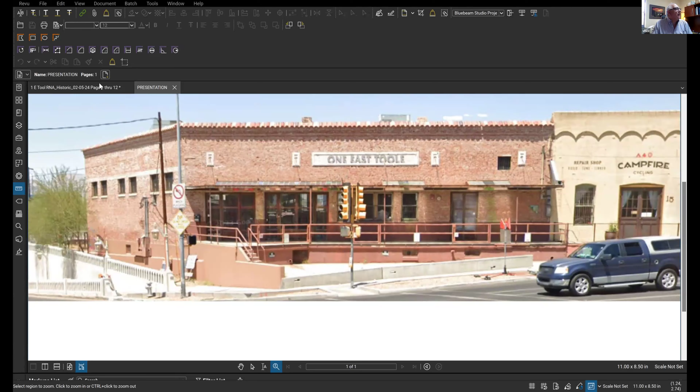I'm going to go to the presentation description. Basically, we're recommending installation of a handicapped ramp in the front, built out of steel to match the steel in the windows. We had originally proposed a cable system, which is what Rio Nuevo discussed. So the ramp is needed to meet handicap requirements and exiting—item number one, add an accessible ramp to the existing historic building. At this time, the building is not accessible.

Two, the building had a staircase on the west side that's been destroyed over the years—this project adds a metal staircase as a required second exit. Three, building code requires the existing basement windows along the west side be fire rated for an exit corridor. I'll show pictures in a second, but because the walkway along the west side is only 7 feet wide, the windows at that base have to be fire rated to protect people walking along the exit way.

For the south operable casements, they need to be replaced. At that time we started the process, it was just being tempered, but I just got the report back from the city yesterday, and they're requiring that those windows also be fire rated. So they're going to be fire rated windows in the steel frame, in the same locations as the windows along the basement storefront, but we'll be replacing with a fire rated assembly in a steel frame.

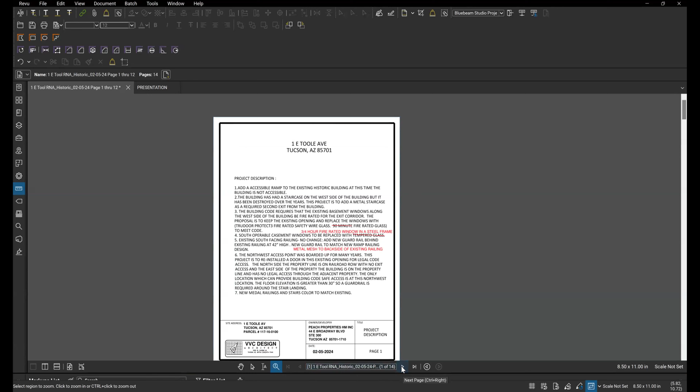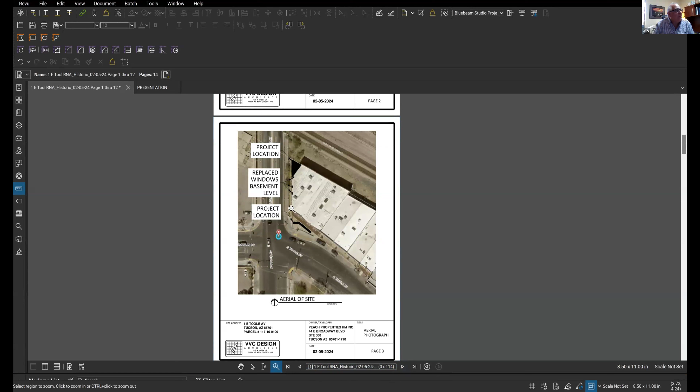I'll go to the next page, which is basically the same thing, just the narrative. The project is the staircase on the west side and the ramp on the south side, and replacing the windows in the basement on the west side, and also along the south side.

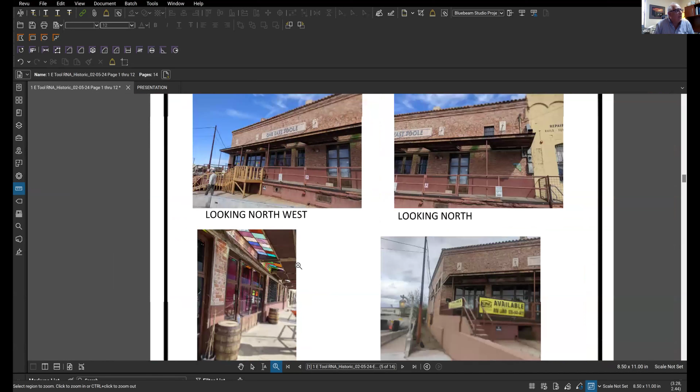This is what the building looks like at this time. They built this temporary ramp that didn't meet any code requirements, and it was removed. This is the location where the ramp goes, and it has to be at least 36 feet long for the 1 to 12 slope to meet code, because of the height.

We found out that they don't have any lighting in the front, so we were asked to put some lighting underneath the awning. We could have put it behind this metal piece so it's not even visible. It does meet the foot candle requirements for the building code because of the street lighting and proximity, but it doesn't meet our DRB requirement for the building to have lighting on that walkway, which we would want to provide anyway.

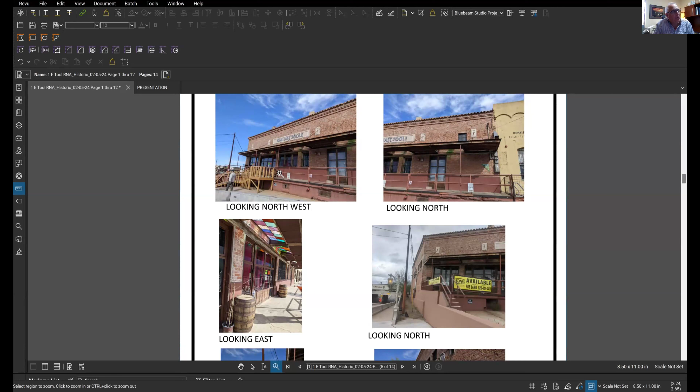So the biggest change we have is here on 17 East Toole, the adjacent building. They have this wire mesh, and in our drawing we were proposing to go with a cable, more of a cable look. They said that would not be appropriate, and that they would prefer the metal mesh instead of the cable.

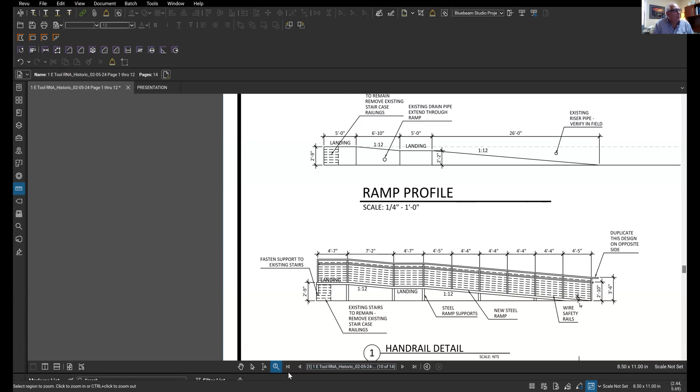So those were the two changes that impact you: one, the material for the railing in the front, and also we would use that same material up on top where the existing railing is. Instead of building a new railing behind it, we would just do the wire on the face. That's basically what I wanted to present, and I'll take any questions at this time.

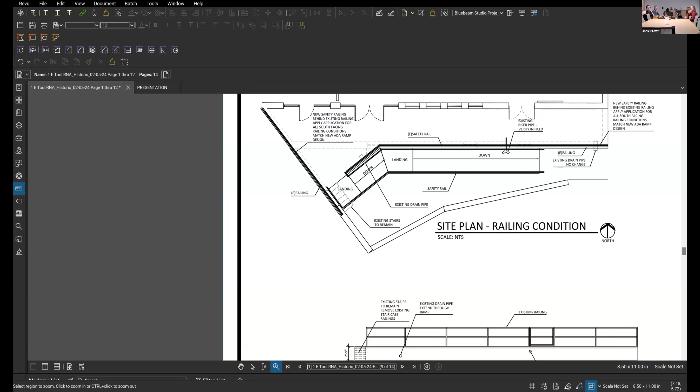Vince, did you talk about the work on the side of the building? Yes. On the side of the building, we had an existing platform and a metal railing that's there now. You can see the picture of it. I don't think it was approved when it was put in, and it doesn't meet code - the rise and runs are not all equal.

So we're basically keeping this, cleaning it up, and then putting that metal mesh because it's above 30 inches and it has to act also as a guardrail. So this is what's existing, and we're adding that metal mesh around it, and then coming down. Because we have another 2 steps, we're actually adding 2 more steps to get down to the grade we need to exit people from. We also have a span wire from TEP that we're working on relocating that's in the middle of the walkway.

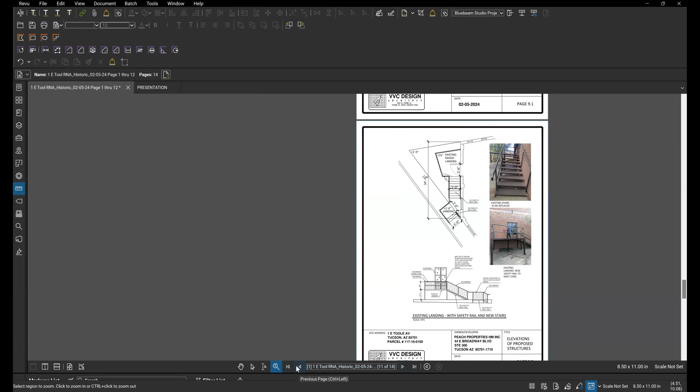Okay Vince, please show again where you propose to put this ramp. Have you thought about any alternate solutions to having it on the front of the building, because it's really so inappropriate?

This is a big issue too, because when we started the project, the property line of the building was at the edge of the loading zone. So this is all city property, and the owner is now in the process of buying that property to get the ramp built. We looked at different alternates, but the ramp is pretty long because the height of the landing is at 2'9", and it's 1 in 12, so it's a pretty long distance. We didn't really have any other alternatives for this ramp location.

Any other questions? You can't put it on the side where you're putting the other exit, on the west? We could put it on the side, but that would mean anybody disabled or elderly would be walking all the way to the side of the building to enter the venue. We would prefer not to, because if it's a wedding or a party, we'd like people who are disabled to come through the front entrance and greet people like everyone else.

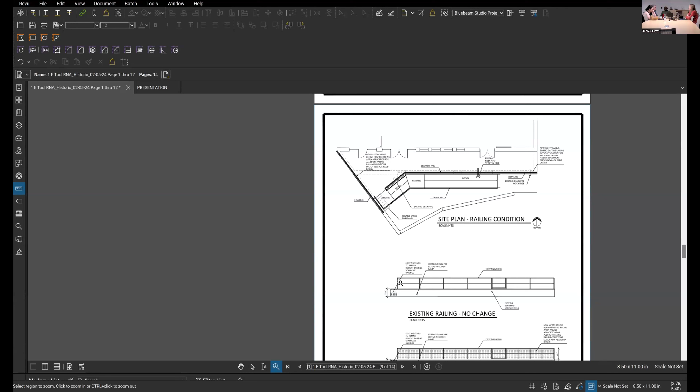Is everybody coming up the ramp? Unless you're going on the side, everybody's coming up the ramp.

Yeah, is it absolutely necessary to put that mesh on? Well, once you get past 30 inches, I need to have some type of treatment so a kid can't fall through. So at 30 inches up, that's why I had to put the mesh.

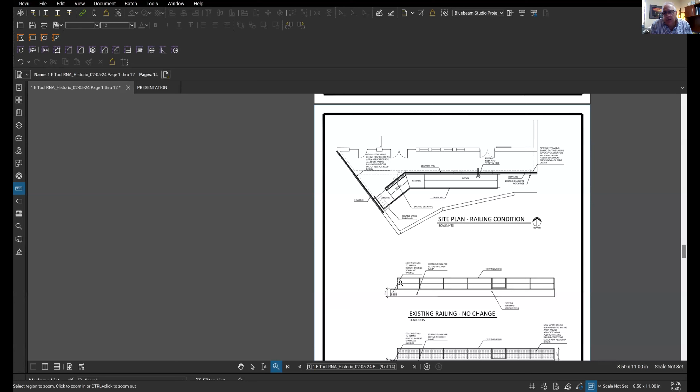Other commissioners, do you have questions? Were you using both mesh and cable in your original proposal? He changed it — now all of it is mesh, and I think it'll be an easier treatment, and it matches the adjacent building. So you're talking both on the ramps and stairs and the decks are all the same? Yes. Okay, but it's just this mesh, not the other treatment? No, just the mesh — that would be the alternate to the cable.

Thank you. Okay, who wants to go with other questions? Jan, do you have questions? Okay, Savannah's going.

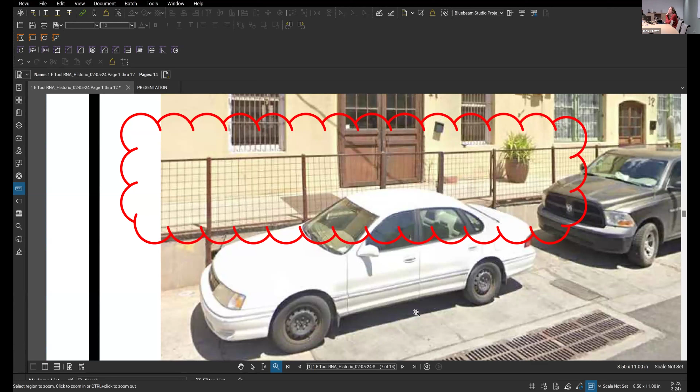Okay, in the drawings, what's the width of the ramp? It's not shown on the drawings. It's 5 feet wide.

Okay, and then are you removing a riser pipe that's in the way as well? We're gonna cap it and provide a screen around it, like a little cover. It's gonna be in the same location. It's not that big — I have pictures here of it. It's not that big, so we're gonna keep it where it is.

And you still have enough room with the 5 feet, because you can reduce the ramp just for that piece? I would suggest jogging the handrail around it so that people don't trip on it. Do you see that?

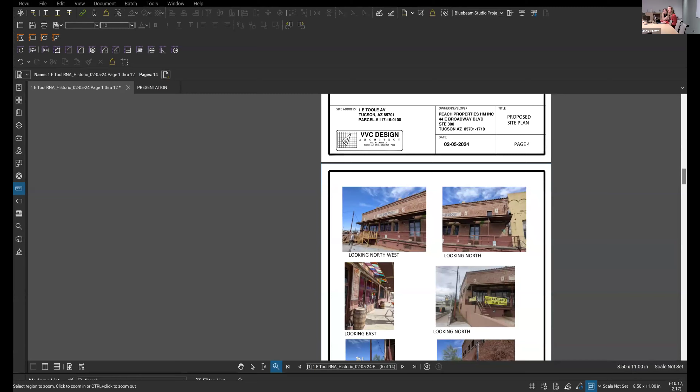Did I share that with you? No, you have to unshare and share again. Okay, stop sharing. Okay, so that's what it looks like. No, you're not sharing. Oh, okay. There it is, sorry.

Okay, and if I need to cut it back a little closer, I can, so it's a little tighter. But remember, they have a railing on that side, so it's not going to protrude much past the railing on the other side, which will take 3 inches.

So you are adding guardrail to this side, even though it's not needed? Not guardrail, handrail. Okay, so that's what I was suggesting, is jogging the handrail around, some way of identifying that. Yeah, neat. And what's nice, it's very close to the edge, and I have 5 feet, so we will definitely take that into consideration.

The drawings for the ramp are just of the south elevation, and then it says repeated on the other side of the ramp, but it should be clarified that it's just the handrail, not the guardrail system, that's repeated. Also, your extension is shown on the top rail of the guard and not the handrail, so I would suggest that gets corrected.

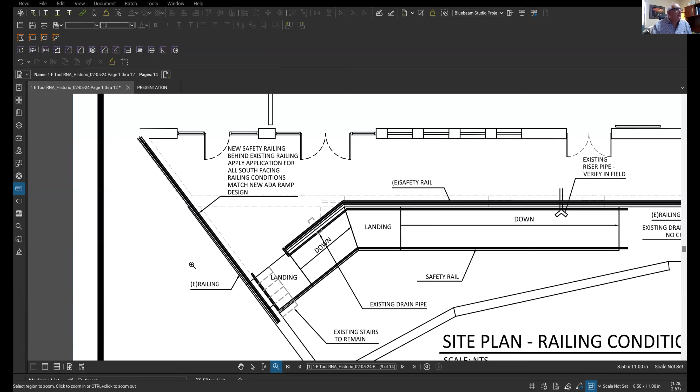Let me see what you're saying. What one, down here? I can't see your drawing. You're not showing on here, the screen. Yep, I had to change, sorry. Do you see it now? What was your question? So if you go to page 9.1. Okay.

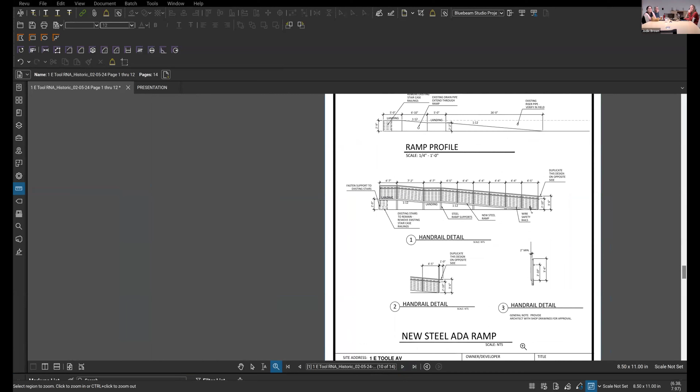Detail 1, at the end of the ramp, you're showing the top rail is extended, not the handrail. Oh, right, should be the other way around. I'm sorry, yes, you're right, you're correct. And that's just a minor architectural thing, but it just...

But I guess the thing is it also says duplicate this design on the opposite side, but in fact, you're adding -- it's just gonna be a railing, yes, just the hand railing. And then you're adding the mesh to the existing guard railing up on the deck, correct? Okay.

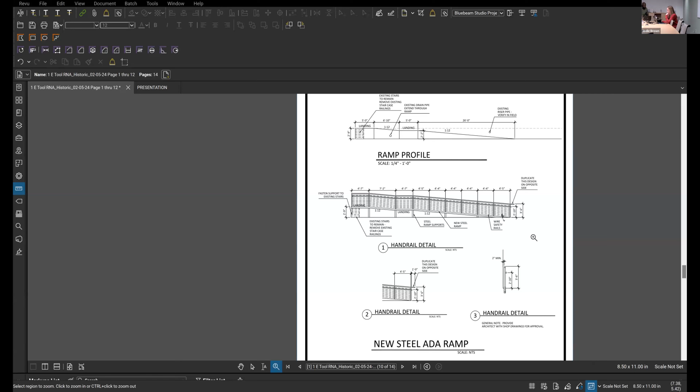And then for the stair, I was curious about that too, because it looks like it should just be a handrail on that side of the, on the building side -- it's just a handrail. Same with the lower, because your elevation shows the guardrail extended.

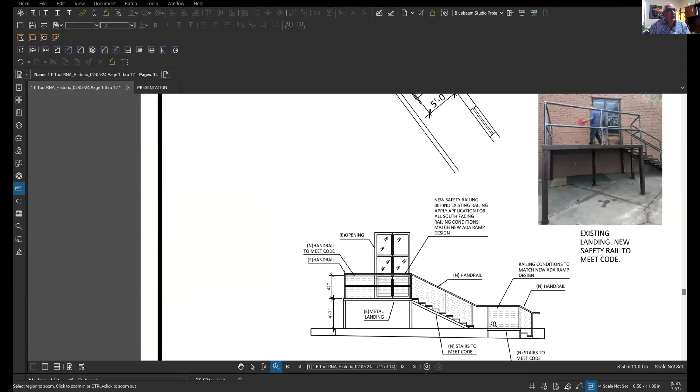Actually, the lower -- let me see here. The lower, I don't even need it, it's just a handrail. You do need to show a guardrail and a handrail of the stairs. Yeah, but when you just get down, it depends on what we're grading it out to -- it's only about a foot higher. It's 2 steps down at the bottom.

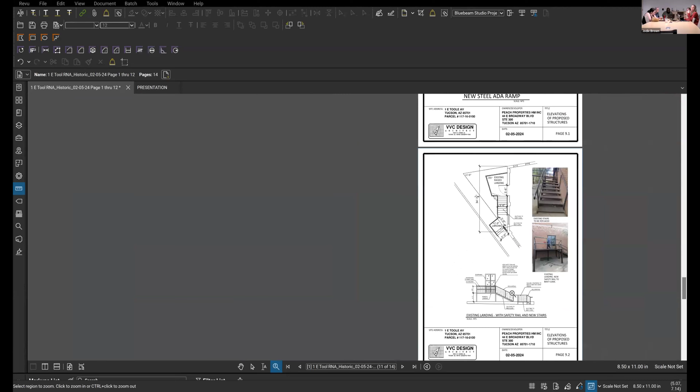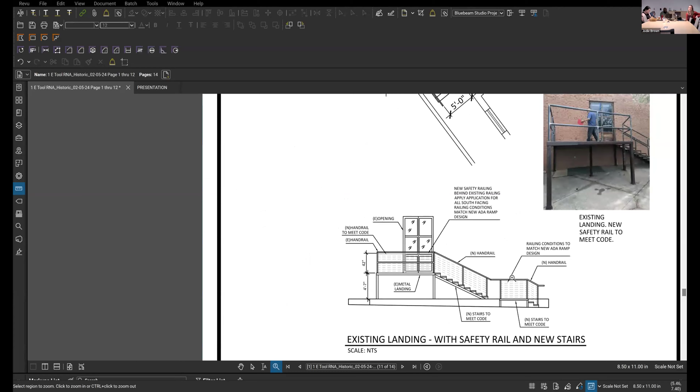Okay, so by the time you're at the second run of stairs, you should have both guard and handrail, and that'll transition somehow to a railing. Now, it'll look nice just to keep the mesh at that lower rail too, on the outside. Do you see what I'm saying, Vince? That second run of stairs should have a 32 -- sorry, the second run, not the first run.

Down here, right here? No, this one, yeah, that should have a handrail too. Oh, on the thing, okay, below here on the drawing. I guess already -- so you can see the handrails that are here. And then we're adding a mesh on the backs, on that side of it, on the existing condition.

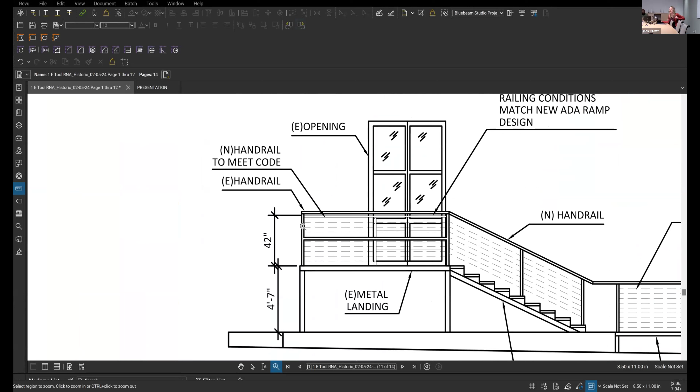So are those handrails or guardrails? Remember, handrails are at 36 inches, guardrails are at 42. Right, so these are at 36. Okay, so you have to add guard up higher -- I think we need to see a detail of that. If it's only at 36 and your drawings say 42, you need to add a guard, right? I think, right, from here down I need to add a handrail here, and I need to add a handrail here, but...

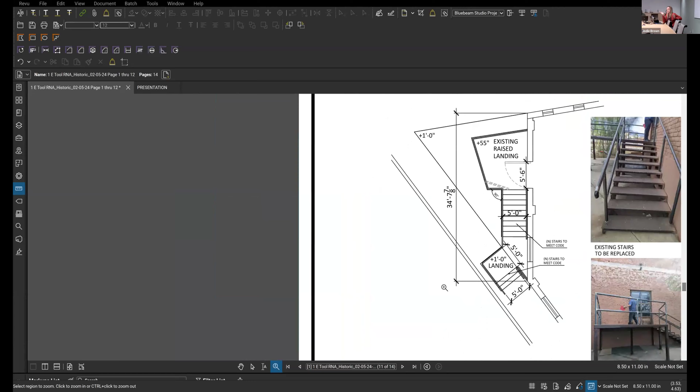Okay, I mean, just to go back to the big idea, despite the discrepancies of the drawings, I think the recommendation by DRB is fine with me. I like the 4x4 wire mesh or welded wire fabric, whichever is proposed, to match the adjacent and rusted steel finish and all that.

That's fine, but I think we need to see drawings that are accurate and portray that mesh and guardrail detailing. And the only other question I had was, how are you upgrading the windows to be fire rated? I didn't see any details of that in here.

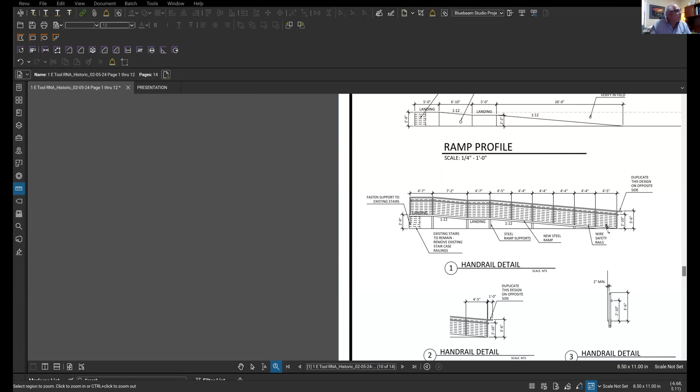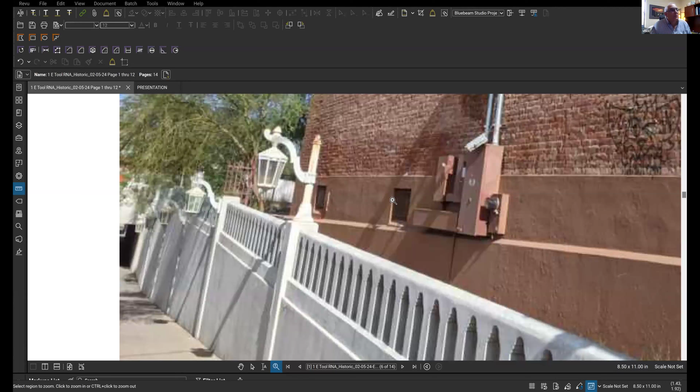Can you see the picture? No, that looks like the south. We see the south windows. Let me put it back, I'm sharing different screens, hold on one second. Okay, so those are the windows on the walkway over here, see them, 1, 2, and one's around the corner.

Does that help? It helps, but we'll need to see elevations of what you're proposing for those windows. We're basically just replacing this steel frame with a window, and we're not changing the opening. It just has to be fire rated because it's along that walkway. We just want to verify there's no change to what it looks like, and we need documentation of that.

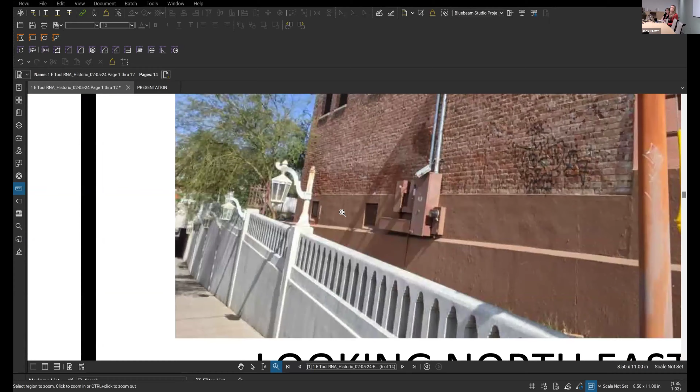Vince, are any of these operable currently? No, in years past they were casement windows, but they've been shut for many years. Yeah, they're more rectangular, right? And these are the ones in your list that you went over at the beginning that were casement windows to be replaced by the metal frame. Yes, steel frame. But you didn't note that they were now inoperable, rather than replacing them with casement.

All right Savannah, do you have any other questions? No, that's it, thank you.

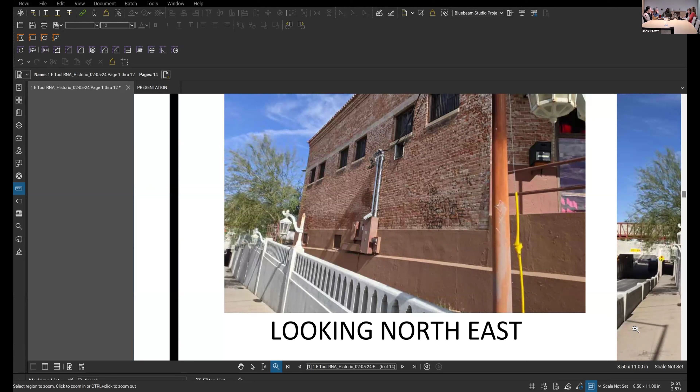Okay, so who's next? Oh, as a side note, if you guys are interested, I ran across a historic photo from the 30s of the building. Did you want to see that? Yes.

Okay, well let's proceed with questions because we need to move along in these cases. Okay, I have some questions.

Go ahead. The fire department connection there on the ramp that you mentioned capping, is that in service? It is in service, they have sprinklers in the building but they added more sprinklers. Has this been reviewed yet by Tucson Fire at PDSD? Yes, and they're okay with the access to that? They approved it, yes.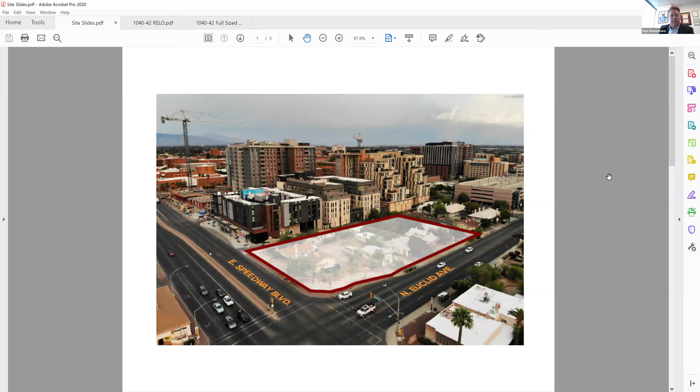At the end of the day, we had initially identified 5 that were movable, and one was an adobe structure that was not, so that approval for that one to be demolished is in place. This is sort of the back half, so we have all the approvals to move the homes, and now we're talking about the details in the rehab and the placement.

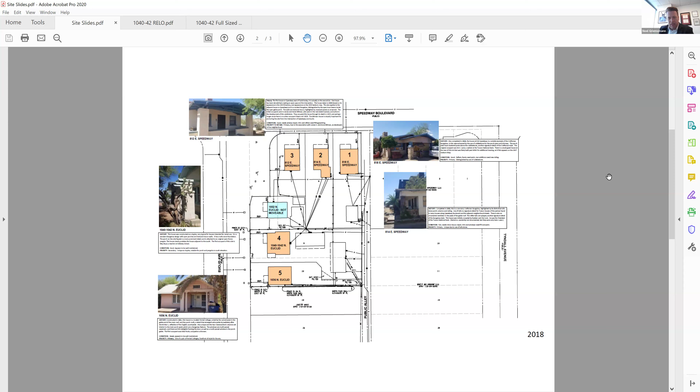In addition, this is back from 2018, we actually added the other 2 homes to the south that will remain on site. We'll be back with some rehab plans on those a little later in the process. But for today, our focus is on 1040/1042 North Euclid, which is the duplex. That duplex will be heading down the road from the site to site 2 on the map here, which is the First Street site. As Jody mentioned, it currently has a non-contributing structure on it that will be demoed and replaced with the duplex.

So the overall plan, to kind of walk you through here.

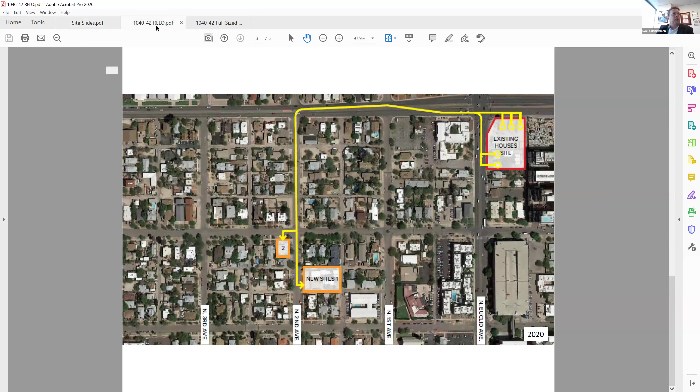Again, the project scope is to demolish that existing structure that you see there in the aerial, relocate 1040 and 1042, and then rehab the exterior. With each one of these homes, as they're relocated, we're not planning on making substantive changes to them. The intent is to pick them up, bring them over, and restore the exteriors to good condition.

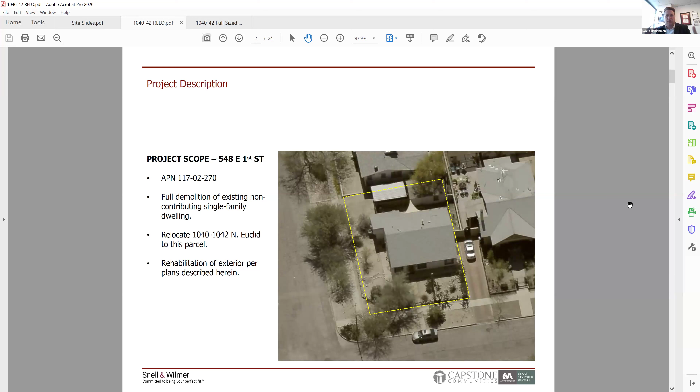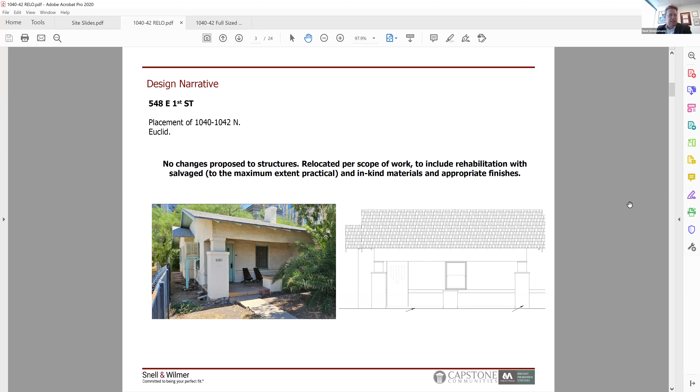So there wouldn't be any additions or anything like that going on. For this particular structure, the idea is no major changes, like for like work, rehab and salvage as much practical material or use in kind if necessary, and finishes. So this is the 1042 side of the structure here in this photo. Again, this is the site we already kind of discussed.

One thing I did want to mention, there is a detached garage. There's a shade structure, which is the brighter object on the south side of the lot. Over behind this tree here, there's another little garage that would be retained. So the plan would be to leave that there, and this little garage, lean-to awning, would come down.

And this gives you an idea again of the overall footprint. This is the current structure that is there, it's being demolished. You can see the little shade structure there and the garage kind of behind it. Nothing too special there - these are just the surrounding context photographs for anyone who's interested in that.

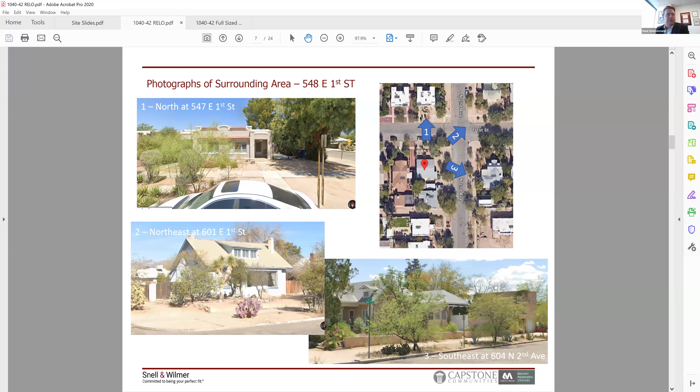Again, the elevation - the existing structure was requested, and then the proposed structure. So this is the rough elevation there for each side here, and I'll flip you through a full-size plan. I think it's a little easier to read here in a second, but essentially it's each elevation calling out the various work, and kind of going to the north elevation.

That part essentially some stucco repairs needed. The window frames need some replacement and repair, depending on the condition - we're doing that evaluation now. One of the comments we got here was to put together a little bit more detailed window schedule for everybody, so our design team is working on that.

The pergola on the south side of this particular structure would be reconstructed. We would essentially have to take that apart because it really can't move with the house. So they'd carefully disassemble that and then restore it in the new location and recycle all of the timber there, barring any obviously heavy rot or something unusual once we get into the actual work.

On the east elevation, again, just the reference regarding window glass, anything that needs replacement, repair, and work in that schedule, and then new dimensional shingles to restore the life of the roof there.

And then on the west elevation, there's a chimney element that would be rebuilt on site, as well as the need - because it's a poured slab condition for the front porches - those would be redone and textured and colored to match the existing. And the porch piers in that elevation would also need to be reconstructed because they're concrete, so those would be reconstructed to match the existing.

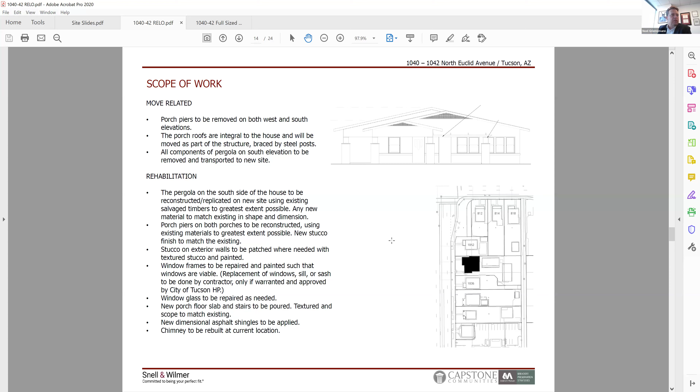Again, the scope of work - this just reiterates the same thing, but essentially most of the house is movable, like the porches and everything are integral, so the mover is able to include that in the lift. But that pergola element would be the one element that we'd have to reconstruct for this home. Let's see, we talked about windows and porch piers, window glass - again, just some more images of the house from various directions.

One of the things we've been careful of, working with Chuck and the Rick Engineering team and our design team, is that it was requested of us to maintain the elevation of the homes on site. So when they're relocated and they do the new stem wall foundation, they'll have a modern foundation, but the top of that stem wall would allow the house to sit at the same height it sits today. So there wouldn't be any radical change in the height of the home compelled by the move. They're working on that.

To the extent some of these have detail—this one not as much, but some of the other ones have additional stonework and things on the foundation. Because obviously with a modern foundation system it would be more CMU, etc. To the extent those exist, we'd be replicating them in place by recycling the material that's there and using it as a finishing material, so it still retains that look. So that's what we'd be doing on the foundations of the homes as those conditions occur.

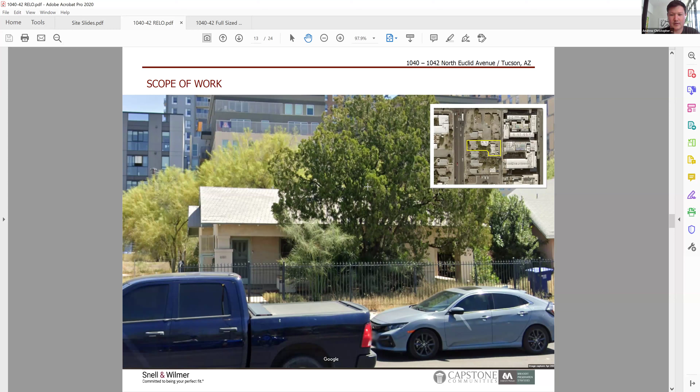So just to clarify the existing orientation of the house: the west side of the house would now be facing east, and the existing south side would now be facing north—is that correct? Let me get this right, I start to invert things. So today, the way the house sits, what is on the Euclid side would now be the Second Avenue side, and the side yard would be the First Street side. So essentially the house would be doing a 180 degree flip to orient to those two street frontages. Okay, I think because it's a corner lot that makes sense. I like that you're getting two frontages with that.

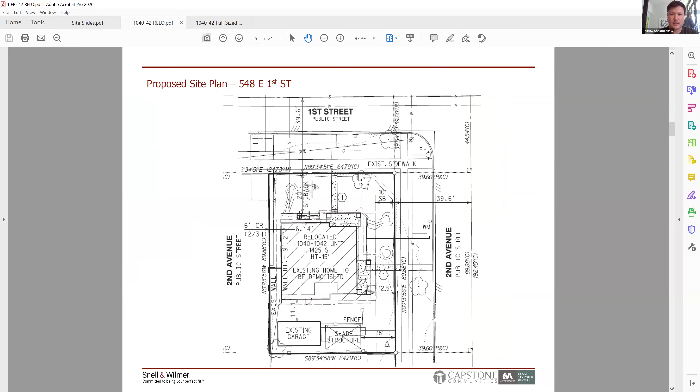I did notice though on the existing east side there's a lot of glazing, and that's now going to be facing west. Does the owner have any intention to provide some sort of shade structure or solar control to that side, since that's going to be a pretty drastic change? Yeah Andrew, that's actually a very good question. We haven't discussed that topic, but that's something we can talk about as a team and get you some answers on when we come back around.

All right. Okay, anything else, Andrew? No, I don't think I have anything else right now. Okay, who's next with questions or comments?

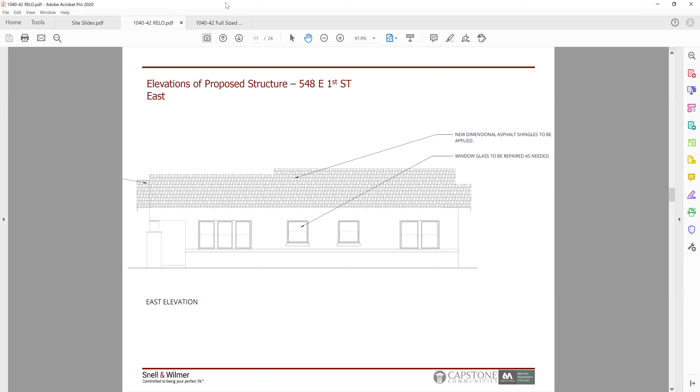I'll go. My only additional comment is on the rubble foundation—it's not super prominent, but it is part of the original look and material of the structure. Are you saying that gets replaced with CMU? Good question. So the actual physical supporting structure would be CMU. Then to the extent situations like this exist with the various stone treatments, we would recycle that material by cutting it, making it, for lack of a better term, an applique, so it would still have the appearance of having the stone foundation.

It becomes a veneer, you're saying? A veneer, yes. I feel like that's a pretty critical element that we want to see in the elevations next time. Yep, okay.

Anyone else? I have a comment about the shade structure comment. The bounds of this project really just pay for the house to be moved, right? Any other shade structure wouldn't be included in this—that would just be up to Joel to build onto the house, whether we're talking about the west side glazing or putting in some sort of shade. I thought this project only cared about the house getting moved, and then Joel does whatever he wants with the repair money.

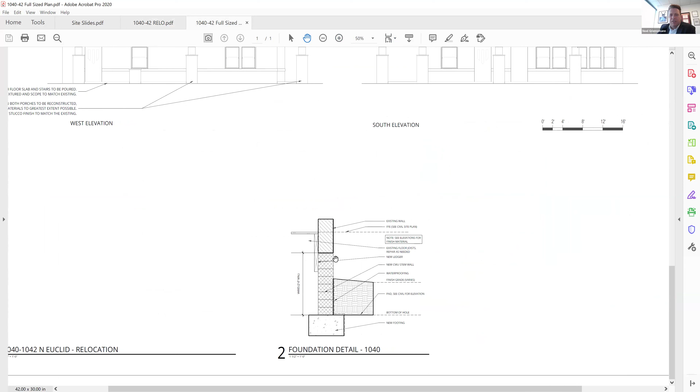The last one I remember is the detail they currently have for their courtesy review for the stem wall, just so it shows CMU, which is part of the confusion, is for them to show the finish. Some of it's stucco that goes all the way down, some of it's the tufa stone, some of it's whatever, so they need to show that detail on their foundation. We'll do that for each one so it's understandable what treatment's going to happen, so that gets you back to looking like it looks today. But you can see, to your point Jody, some of them are a little different on each side, which is a little atypical. We've noticed that with several of the homes, for whatever reason either it wasn't originally done that way or they later stuccoed it. So just working through that.